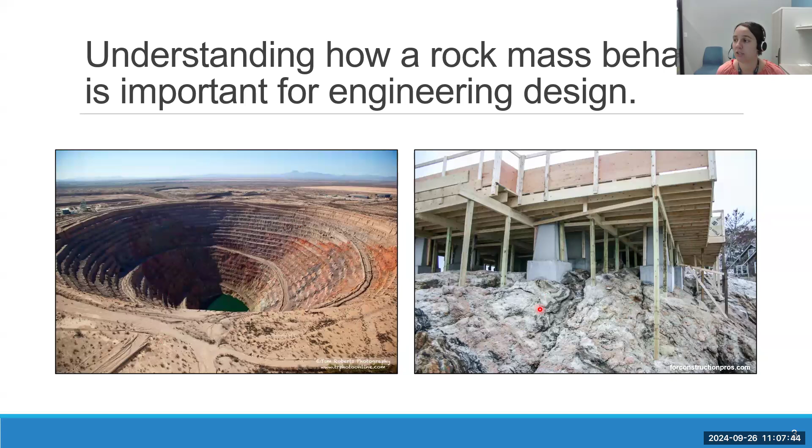So I just used the term rock mass quite a few times in the last slide, so I want to make sure we're all on the same page and define what a rock mass is before we get into the methods and background of this study. So a rock mass is a large-scale rock formation that contains sections of intact rock separated by pre-existing discontinuities. So discontinuities could be things like faults, shear planes, or joints. Specifically for this study, I'm going to focus on joints.

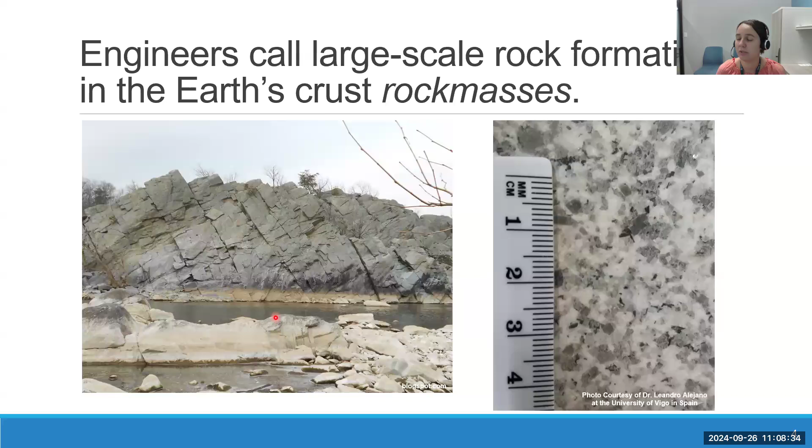So due to the large scale of rock masses, the representative elementary volume is typically on the scale of meters, and this makes quantifying its behavior very difficult. So I'm going to get into the background now of the four main methods for studying rock mass mechanical behavior and their associated pros and cons. So first is large scale lab testing.

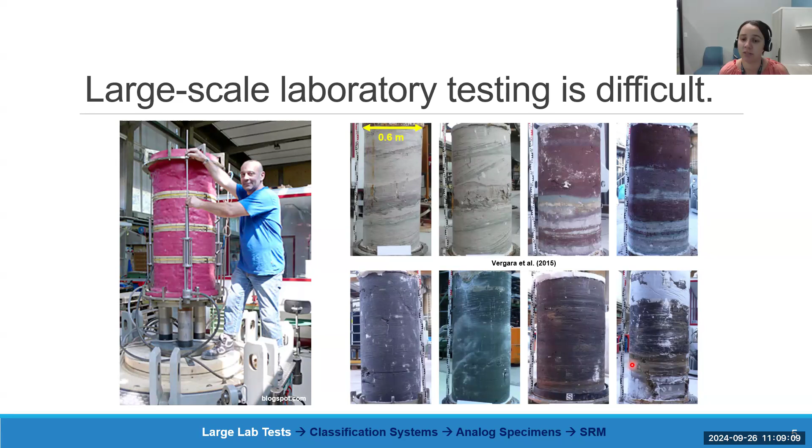Large presses or triaxial apparatus like this one shown in this photo do exist, but the maximum diameter of these machines is typically about 1 meter, and therefore they won't accommodate rock mass specimens with representative elementary volumes of multiple meters or larger, which is quite common in situ. Additionally, extracting, transporting, and installing specimens of this size is very difficult. Not to mention these tests take a lot of power to run, and there are very few facilities in the world that have an apparatus of this size.

So these empirical rock mass classifications are often prone to error, since each system was developed using various assumptions about the rock mass, and the misuse of one of these classification systems in a case where it doesn't apply will result in an ineffective design.

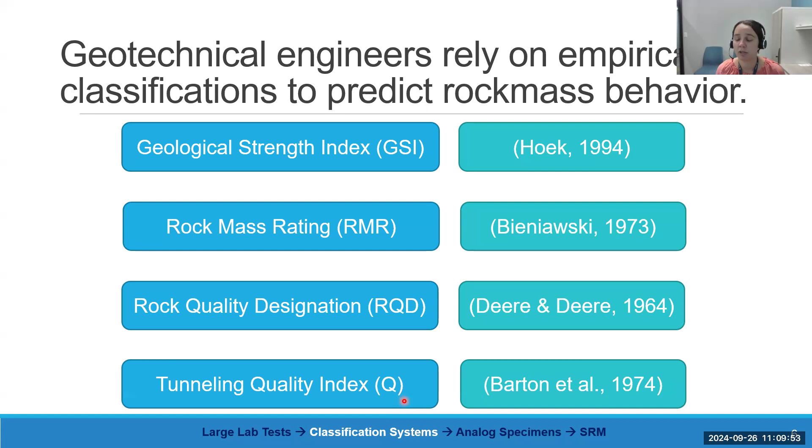All of these parameters have been tested in the past using these small scale analog specimens. And this was done to understand how the joint property affects the overall behavior of the rock. So to emphasize this, this isn't necessarily looking at just the shearing along an individual joint and how the joint properties affect that behavior, but this is actually looking at how the overall specimen behaves.

So that includes intact rock deformation in addition to shearing along the pre-existing joint plane. So kind of a combination of everything to look at this overall deformation. And that's what I'm going to be talking about through the rest of the presentation. So the trends deduced using these lab scale specimens can then be extrapolated to larger field scale rock masses.

In these analog specimens, joints are artificially created so that the joint property in question, like roughness or persistence, can be accurately isolated. And this is really powerful because if we were to just take in situ rock mass specimens straight from the ground, it's not very easy to control the properties of these specimens. How do we really assess how rough the joints are, or how dense the joints are, or their persistence and other properties like that? If we can artificially create these specimens, that means we know exactly what the properties are because we're creating them ourselves, and that allows more control in the laboratory.

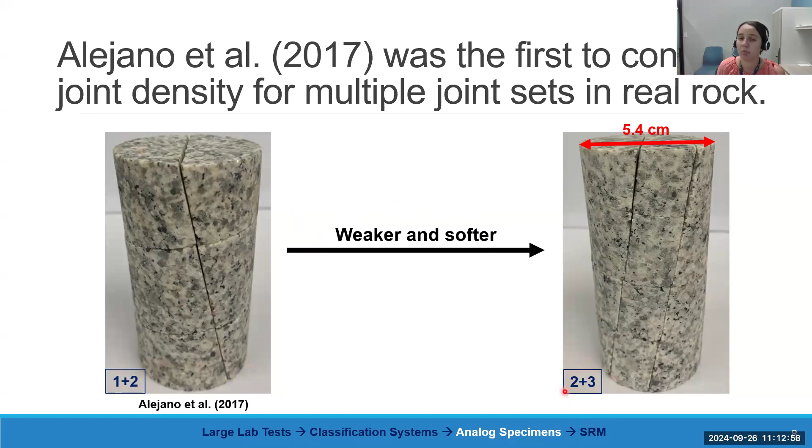So I want to note that very few studies on rock mass analog specimens have actually used real rock. And this is simply because of the difficulty of specimen preparation. So take, for example, the simplest geometries here on the left, which are the same as these specimens I just showed you from the Alejano et al. 2017 study. These contain smooth saw-cut joints. But for specimens that are only 5.4 centimeters in diameter, you can imagine that it's actually pretty difficult to consistently and accurately cut these joints, since we want to standardize the locations and the orientations and other properties of these joints.

And imagine too, if we want to test even more densely jointed specimens, it's very difficult to cut these joints. Also, for more complicated jointing, like rough and impersistent joints, the specimen preparation methods are extremely difficult. And to date, there actually haven't been any methods that I've seen in the literature that are able to prepare specimens of this type in real rock.

So instead, there have been a lot of studies using analog specimens that utilize 3D printing, or they create the specimens using other synthetic materials like plaster of Paris. But these materials don't have intact rock characteristics like its high strength and brittle behavior.

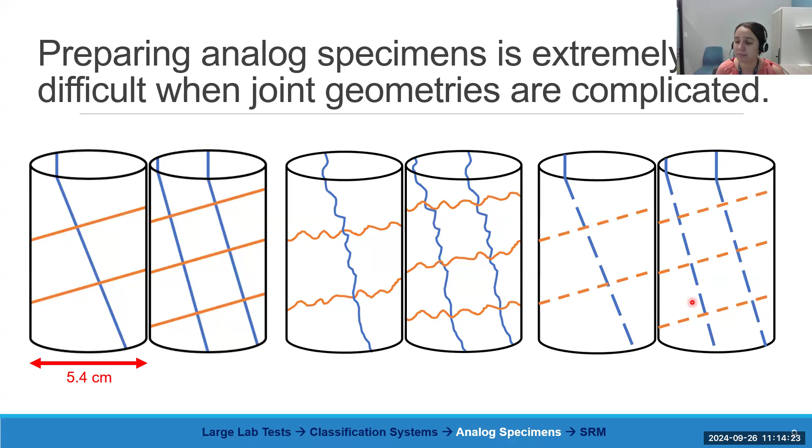So numerical models are the 4th technique for studying rock mass mechanical behavior, and numerical models can avoid the practical limitations associated with lab testing that I just talked about. And this is because computers can easily simulate joints of any geometry, including the rough and the impersistent ones and other more complex joint patterns. So specifically, I want to talk about synthetic rock mass modeling, which will henceforth be referred to as SRM. So SRM has been used for decades to simulate rock masses.

SRM is based on the premise that if a small scale model can be calibrated so that its micromechanical behavior approximates the failure mechanisms occurring at the grain scale in real rock, in addition to matching the emergent material attributes like strength and stiffness, then the model will act mechanistically realistic at other scales, but more importantly, under other conditions, like with the presence of a discrete fracture network.

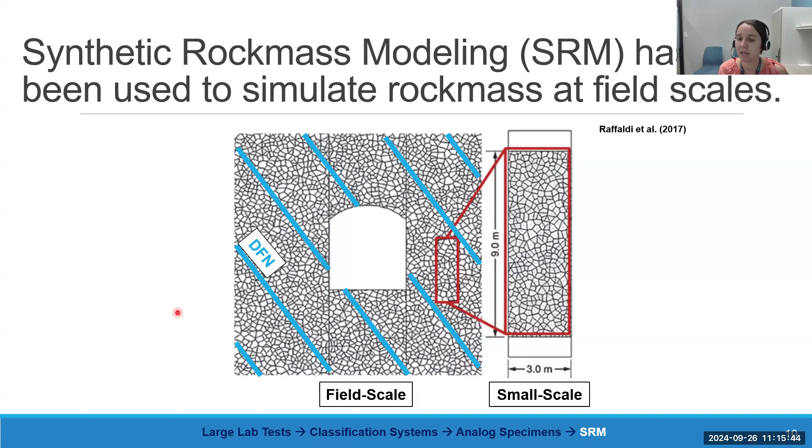So the issue with the current state of SRM is that it's mostly been used in industry, where these models have resulted in reasonable field scale ground behavior that was in the right ballpark. But to date, there hasn't been a peer-reviewed proof of concept to verify this method. And this was the motivation for this study.

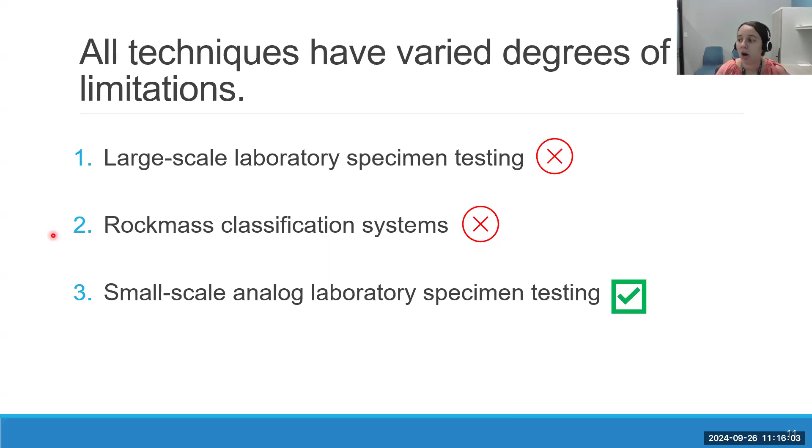So I want to summarize all of the background that I just went through. Large-scale lab specimens and rock mass classification systems are not practical for investigating rock mass mechanical behavior. However, small-scale rock mass analog specimens are a good way to investigate trends in how jointing affects rock mass behavior, despite the limitations associated with specimen preparation that I talked about earlier.

And numerical modeling is an up-and-coming technique for rock mass behavior prediction, but there's still a lot to be learned about the predictive capabilities of numerical modeling of rock mass, specifically SRM. So with all of this in mind, this research project uses the concept of small-scale rock mass analog specimens to ultimately investigate rock mass mechanical behavior.

So specifically, lab-scale specimens, the analog specimens of rock, were simulated using numerical modeling. And the reason for simulating the lab scale specimens was to ultimately use available laboratory data to verify the predictive capabilities of the numerical model. And this is something that hasn't yet been done regarding SRMs.

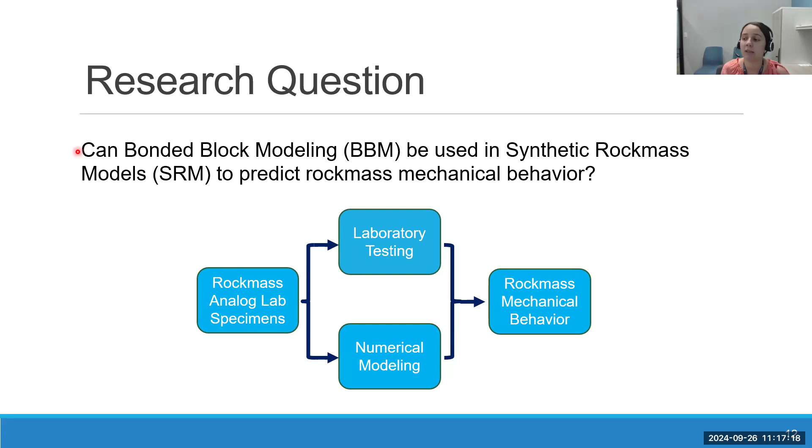So the main research question was, can bonded block modeling be used in synthetic rock mass models to predict rock mass mechanical behavior? I'd like to note too that for this validation of SRM, we've only looked at the addition of a discrete fracture network, and we didn't look at the upscaling from the lab to the field scale. So that's one of the major limitations of this study.

So this slide outlines the 4 main research steps as part of this study. Like I talked about earlier, laboratory studies were performed on both intact and jointed rock. And this data was actually taken from that Alejano et al. 2017 study that I talked about earlier. Next, a numerical model of the intact rock was generated and calibrated to the intact laboratory data. And I'll talk about the details of the model generation and calibration process a little bit later.

After that, joints were added to this intact calibrated model in the exact locations and orientations as the joints in the jointed specimens. And finally, the results of simulations like triaxial and UCS test simulations on these jointed models were compared back to the laboratory results on the same jointed specimens. So it's in this 4th step where the predictive capabilities of this numerical model can be assessed.

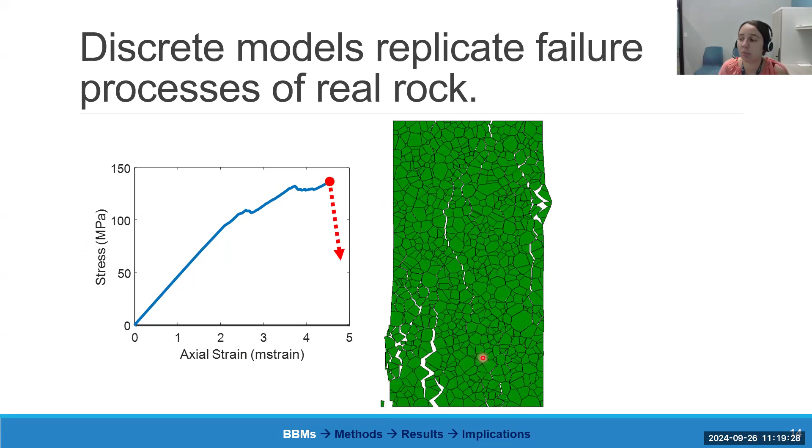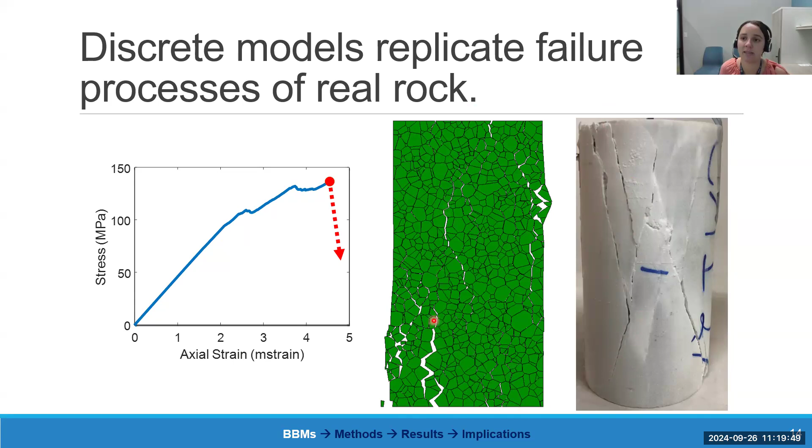Fracturing initially occurs through various locations of the model, but eventually the fractures will begin to coalesce into a global failure surface. So this grain scale deformation is akin to the failure processes in real rock. I just threw a picture of a real rock failed under UCS conditions here for your viewing. You can see that the fractures formed in this real rock specimen look quite a lot like the fractures formed in the model. We see that axial splitting, the axially oriented tensile fracturing, and we see that in the model as well. And this is not a coincidence.

So specifically, this model that I just showed you is a bonded block model, which will henceforth be referred to as a BBM. In BBMs, material is broken into continuous elements, which are referred to as blocks.

So in the case of rock, these blocks can actually represent individual mineral grains, but it doesn't have to. Blocks interact then with adjacent blocks via contacts. And you can think of a contact as a stiff spring that connects these two discrete blocks.

So the deformation of a single block is induced by exterior stresses on the element and are governed by input parameters like stiffness and strength, and these are referred to as block properties. The interaction of a block with an adjacent block is also governed by input parameters like stiffness and strength, and these are referred to as contact properties or contact input parameters.

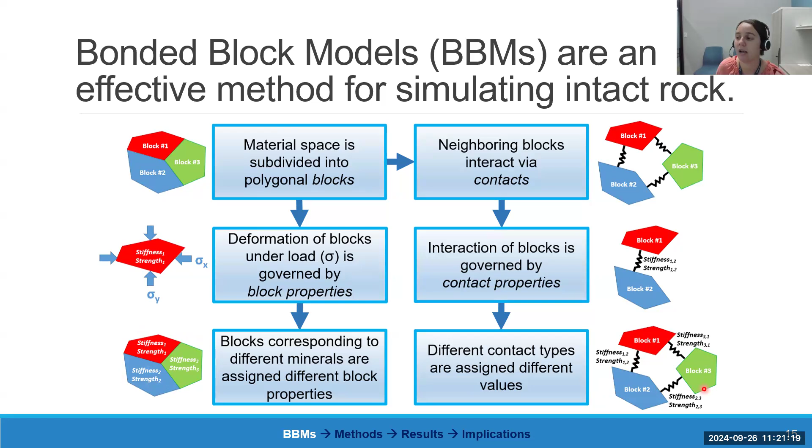So there are two main subgroups of BBMs where the blocks can be modeled either elastically or inelastically. And I found now that I work in industry that we actually use the term plastic a lot. So if you're more familiar with plastic, that's the same thing as inelastic.

So elastic blocks require only stiffness as an input, which means that these blocks are able to deform elastically, but they can't permanently deform. So if the load on an individual block begins to decrease and eventually goes back to zero, the block will actually rebound and return to its original shape and size.

So once the stresses on that block reach the strength criterion level, the block will then begin to permanently deform. So this means that even if the stress that's applied to the block begins to decrease, the block will never be able to return to its original shape and size because it's been permanently deformed.

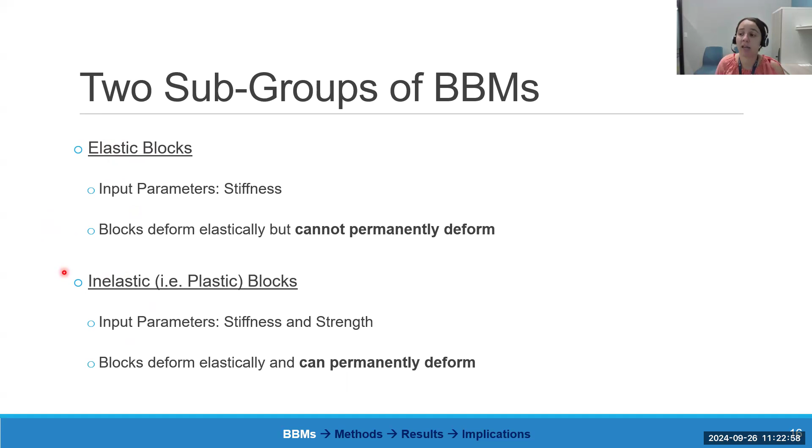So both types, elastic and inelastic blocks, have been used in the literature, and both have been considered for this study. And they both have pros and cons, which I won't get into all of them, but the main one is that elastic block BBMs have significantly lower computational load. But then also inelastic block BBMs have been found by other studies to be necessary to replicate the post-peak behavior of rock deformation. So pros and cons.

So the calibration process means that I carefully selected all of the block and contact input parameters so that the emergent macroscopic behavior of the model approximated that of the laboratory data. And this calibration process is actually required for all discrete models because the majority of input parameters into discrete models are not able to be directly measured in the lab or in the field.

So at this point, I also want to draw attention to the other main limitation of this study, which is that we utilized a 2-dimensional model to replicate the behavior of a 3-dimensional laboratory specimen. And so the main reason for doing that is that 3D BBMs at this point have a prohibitively high computational load, especially when the goal was to replicate the grain scale structure of the rock, which is down to the millimeter scale. So it wouldn't have been possible to use a 3D BBM for this study without it taking much longer than I would have wanted to finish my PhD.

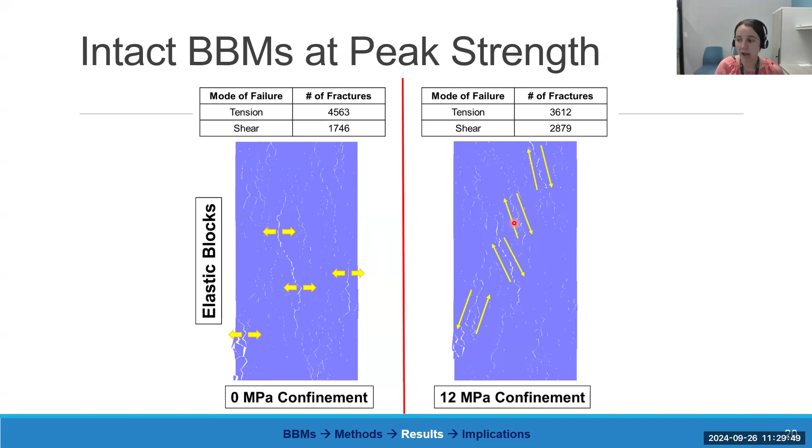Okay, so in these last few slides, I just showed you all that the calibration I did was good. So now that I calibrated this intact model, the next step is to add the 2 different fracture geometries, so the 1+2 and the 2+3. And I ran these simulations without changing any of the input parameters from the calibration. So no adjustment of input parameters whatsoever.

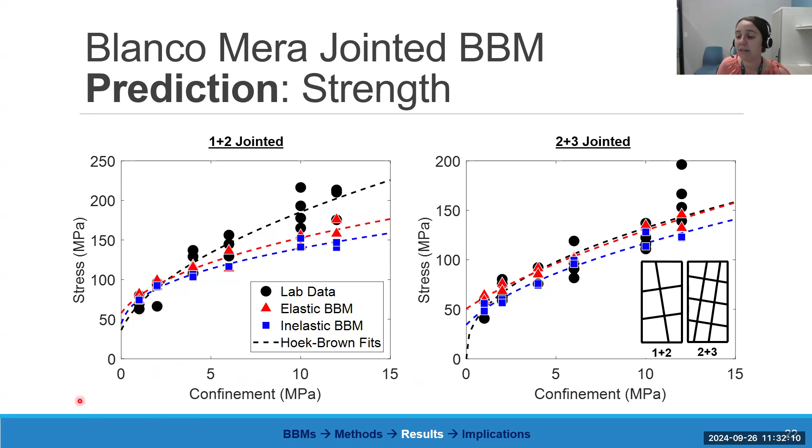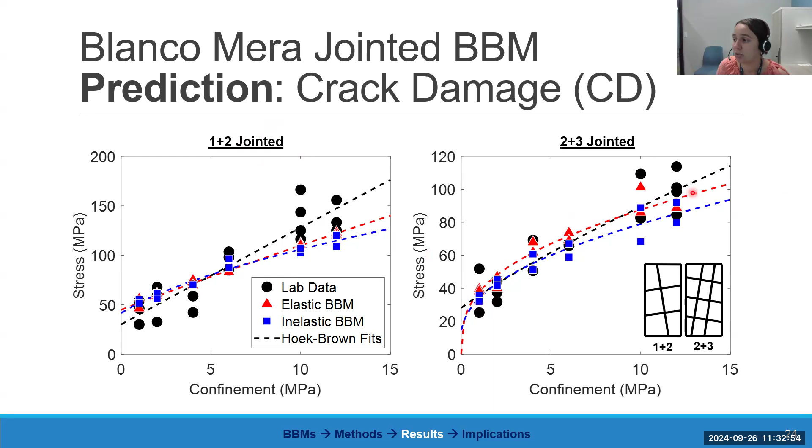I'm going to start to sound like a broken record, but this is also crack damage thresholds if you're interested. We see the same slight underestimation of crack damage thresholds for these two higher confinement cases in the 1+2 geometry, which makes sense since we saw a slight underprediction in the strength, and CD and strength are related. But also we didn't see that in the 2+3 jointed case where the predictions were quite good.

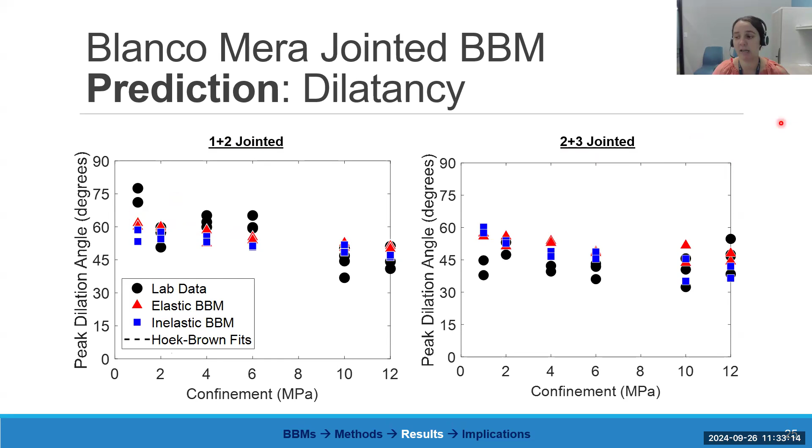And finally, I also want to show you dilatancy. Both model types were also able to predict the dilatancy of both model geometries, 1+2 and 2+3. So overall, the results were very good, better, I think, than we were even expecting. And I just want to summarize everything now.

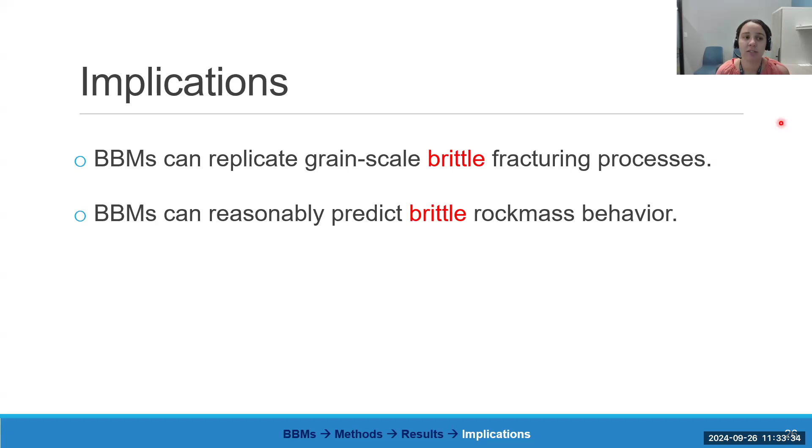So the bonded block model was calibrated to reasonably replicate grain scale fracturing processes in real rock, and that gave it its predictive capabilities, meaning that bonded block models can predict rock mass behavior under conditions different from which they were calibrated. So intact BBMs can be calibrated at the lab scale and then applied to other jointing scenarios using numerical modeling.

This research has verified the concept of the synthetic rock mass models. So that's good news for all of the past studies that have used this concept without such a rigorous verification. So one important caveat to these findings that I want to highlight, and I actually did highlight them in the red font, is that this research has only shown these statements to be true for this one specific rock, Blanco Mera granite, which is a highly brittle rock.

And this was actually the motivation for another chapter of my thesis where I replicated this same study, the entire process, including the laboratory testing campaign, on a less brittle rock. But I won't get into that today, maybe a topic for next year.

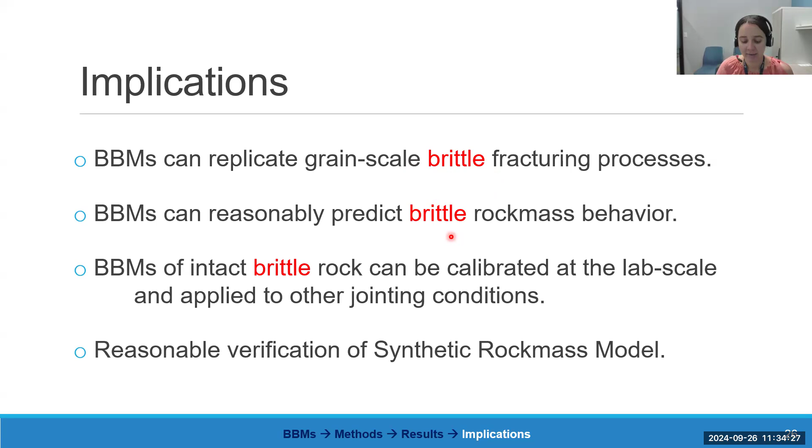And so just to tie everything back in together, I mentioned a couple times now that the major limitation associated with laboratory testing of the rock mass analog specimens is the difficulty of preparing the more complex specimens like rough and persistent or the heavily densely jointed specimens. So this

verified the predictive capabilities of the Blanco Mera Granite BBM, which provides us with a unique opportunity to now test these more complex specimens using the model. And this is another thing that I did for my PhD research, and definitely won't get into that today. But yeah, I think this study has opened up a door to be able to test a lot of things with certainty that people haven't been able to in the past.

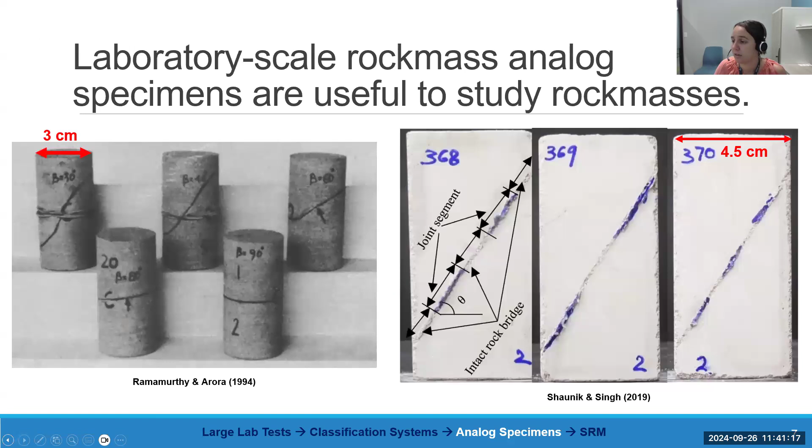Anyone else? Actually, Andrew Corkum has a question: if you have published journal papers from the work. I believe you showed one in the beginning, right? Yes. Yeah, I was gonna say I can try to go all the way back here. This paper specifically is published open access, so if anyone's interested in reading it, you can search this title or my name, West et al. 2024, and you can read it open access. Nice.

So super exciting. Yeah, I have all but one chapter of my thesis published so far. So if anybody is interested in the papers, send me a message or an email or LinkedIn or whatever, I can get them sent to you. So there's this study that I just presented. And then as I had mentioned a couple times, I repeated this study for a less brittle rock and compared the results, looking at the ability of the bonded block model to replicate brittle versus more ductile or a little less brittle rock behavior.

And then I also used this study and added a bunch of different discrete fracture networks with different properties, like testing persistence, orientation of joints, roughness, things like that. This has been looked at in the literature before, so we checked whether this model was able to see the same trends, but then we were also able to use the model to test more complex jointing that hasn't been tested in the literature. So we kind of confirmed some results and presented some new results. That paper was published recently, so I can send that to anybody as well if they're interested. That's great.

Oh, I see Professor Zimmerman is here. Professor Zimmerman, congratulations to you on the new book. Yes, thank you very much. I hope you can hear me. Did I unmute myself? Loud and clear. Yes. Okay. Do you have any questions?

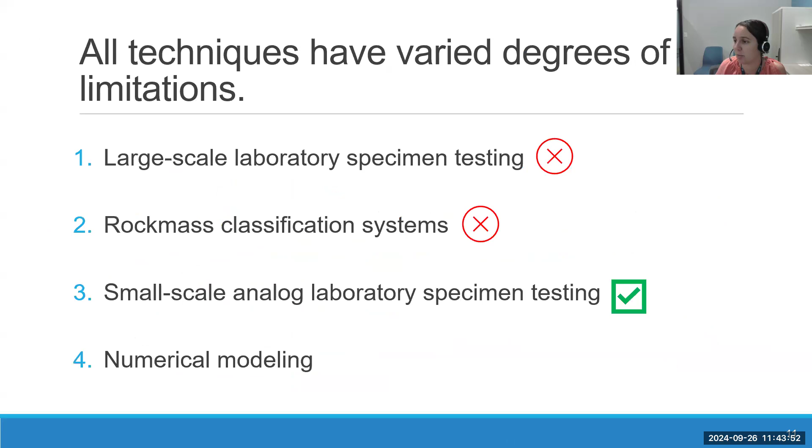Great. So there's another question in the chat. Is there a takeaway here about the applicability of the Hoek-Brown strength model to jointed rock masses as a function of joint material scale? Good question. Yeah, in some of my plots here I put some Hoek-Brown curves, so I'm not sure if that's what spurred this question. But we didn't do any rigorous analysis on Hoek-Brown for this study. Mostly, I just fit these curves as a way to guide the reader to see the trend in increase in stress as a function of confinement for this specific study.

But this is actually something that my advisor, Dr. Gabe Walton, and I are still working on. We've used the calibrated predictive bonded block model that I just presented, and we're working right now on running even more simulations, and we're going to look at the applicability of the geological strength index, and how that relates to the Hoek-Brown criterion for rock masses, given that we're now able to analyze so many different joint properties, some that may or may not be considered in GSI, or are considered intrinsically, but not as rigorously as we would want to easily attribute a GSI value.

So this is in the works. Can't share any secrets yet, I guess.

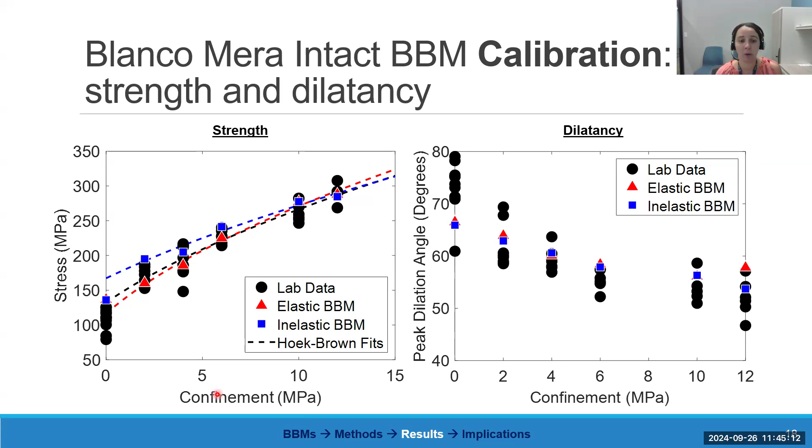And then in terms of material scale, yes, another great question. So we collaborate a lot with Dr. Alejano in Spain, and his lab has actually been working on this topic. So they're the masterminds behind the jointed specimens. They are able to saw these guys really, really nicely. So they are working on, and I think they actually published recently, so I can get you that paper if you're interested. They did a study where they did these 1+2 and the 2+3 joint geometries,

and they looked at 3 different sizes. So they've got these specimens, which are 5.4 centimeter diameter, and then they have a larger one. I can't remember exactly the size. And then they have an even smaller one, I think it's about 3 centimeters diameter, or 2.5 maybe, which is very, very hard to saw even 2 joints into those specimens, but they've done it. So they're great. And they looked at scale effects. So I can give you that paper if you're interested. Just shoot me an email or a message.

Okay. Question? Yeah, our chat is getting very lively. There's BT Lee who asked, thanks for the presentation. For the stiffness, what is the range of the stiffness values? Did you put shear stiffness also? Is there any difference in stiffness for the joints with or without cement?

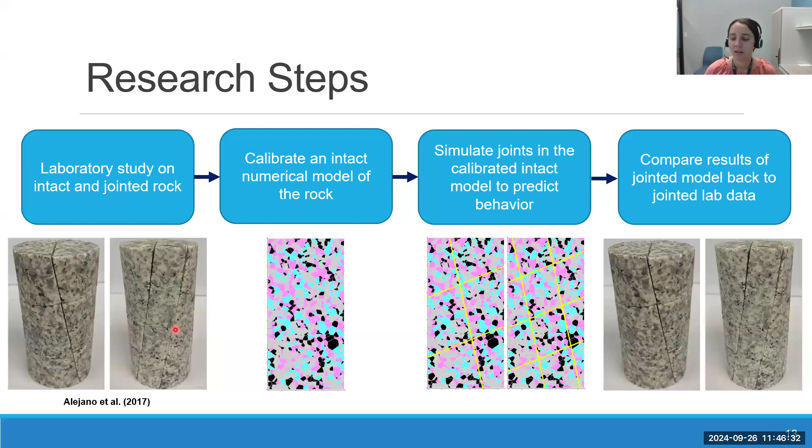So we specifically use the Mohr-Coulomb failure criterion. So they've got cohesion and friction angle, and we did strain softening too. So peak and residual cohesion and friction angle values. So they all do have cohesion, and residual cohesion goes to 0. So I think it ranges between maybe 2 or 3 to maybe 35 megapascals for the peak cohesion.

So once the strength of the contacts is reached based on the cohesion and the friction angle, then it degrades to residual values where the residual cohesions were all 0, and I believe the residual friction angles were about 5 degrees for the contacts, whereas the peak friction angles ranged from, you're testing my memory here, it's been a couple years since the PhD. I think they were about 20 to 50 degrees, depending. So a quartz-quartz contact, for example, will be very strong, whereas a mica-mica contact will be soft. And we've got kind of a range.

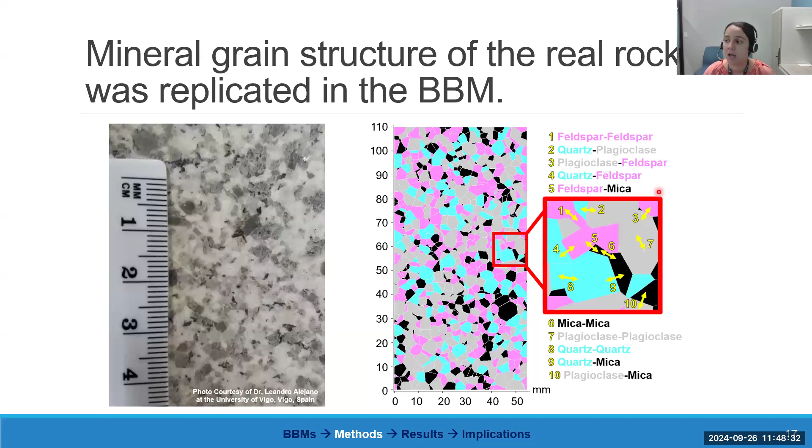And then for the jointed models here, the big joints are much less stiff, and they don't have any cohesion or tensile strength or anything like that. And actually the friction angle input for these large joints was measured directly in the lab as 30 degrees. Because the point of this study was that we calibrated the intact model, but we didn't want to calibrate any of the input parameters for these joints. So that's another reason we used smooth joints, because they've got 0 cohesion, 0 tensile strength, and we were able to directly measure that friction angle in the lab.

Is that the whole question, I think? Yeah, and yep, shear and normal stiffness values for the contacts.

Okay. Okay, it's better to say it in the microphone, sir.

Yeah, that's a good question. So that's part of the calibration process. The first thing that I found is the best to start with for calibration is the stiffness parameters, because the stiffness parameters really only control the linear elastic region of the overall deformation of the simulated specimen. So Young's modulus and Poisson's ratio.